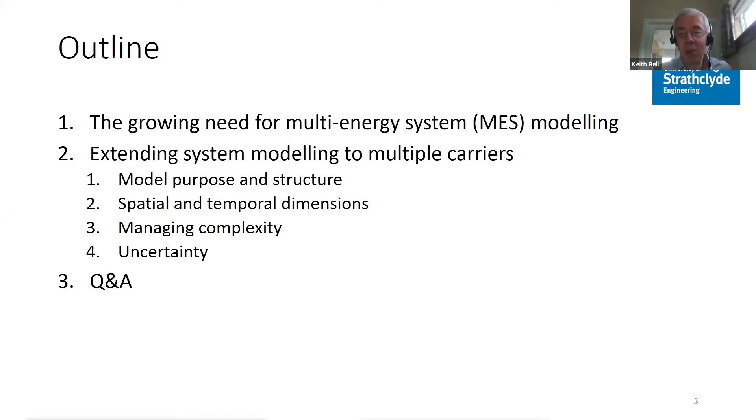For me, the main motivation for doing a lot of this is about emissions reduction. We've known about the greenhouse gas effect for 50 years, really. The evidence that points towards it has been growing. It's pretty strong, actually. Five years ago, the Conference of the Parties, the COP, met in Paris - the 21st such Conference of the Parties - and agreed a set of goals for the world in terms of limiting global temperature rise to significantly less than 2 degrees C and trying to limit it to 1.5 degrees C. So we need to take some pretty dramatic action in terms of greenhouse gas emissions to achieve that goal.

Because the impact of climate change - already we're seeing it getting pretty severe in many places - we're definitely already on that path towards 1.5 or 2 degrees C. We don't want to go any further than that. Action is needed in every sector of the economy, and that's going to have a big impact. But certain sectors are particularly hard to decarbonize - aviation, for example, shipping, certain parts of industry.

In terms of the trajectory for getting there, there are all sorts of trade-offs that need to be decided. Which things do we do first, which can come later? It's really in trying to understand all of these trade-offs that we need to do this multi-energy system modeling, and also to be sure that the resilience of an energy system - the ability to prevent, contain and recover from interruptions to supply - is not compromised by these changes to the sort of assets that we're using.

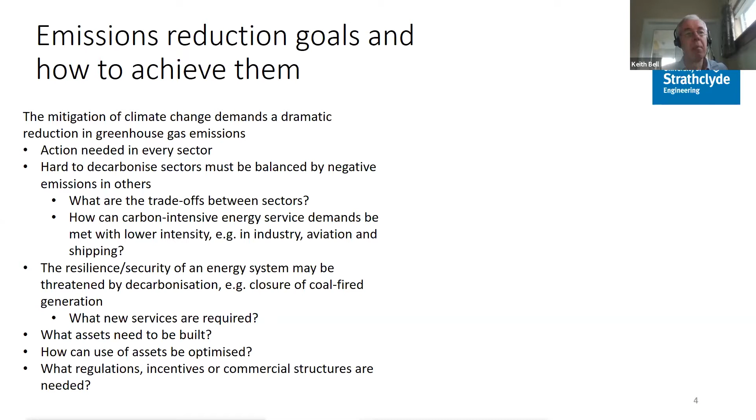That in turn raises some big questions about how are they going to be paid for? Who is actually going to invest in building and operating these assets? What kinds of regulation are going to drive it? Are there some sort of limits around their operation? What sort of incentives or commercial structures? All of these things, I think, come into the scope of multi-energy system modeling and help to show why we need it.

So you can see one for greenhouse gas reduction of 80% by 2050, but others of 85, 90, 95, and 100%. You can see some of the differences there and how it's squeezing particular sectors much harder to get the emissions further reduced.

Now, one of the things I think is maybe curious about this, it's almost a modeling artifact. This has come out from an optimization which has been set a constraint in terms of the emissions and trying to meet it at least cost, given a large set of data on the energy services to be delivered and what all the various technologies are, the relative costs and emissions.

And as it squeezes harder and gets a bigger reduction, it's actually squeezing particular sectors. So it eliminates, going from left to right, all emissions from the residential sector, but seems to leave the transport sector alone. Why should that be? Is it really so obvious that it's going to be much better to do everything in the residential sector and leave transport? Actually, I think the costs are so close together that maybe that's not the right kind of answer, especially when you look at it in light of the uncertainties about what those costs really will be.

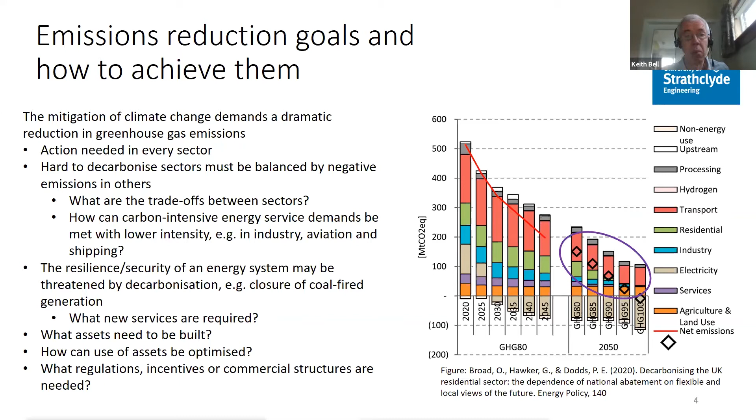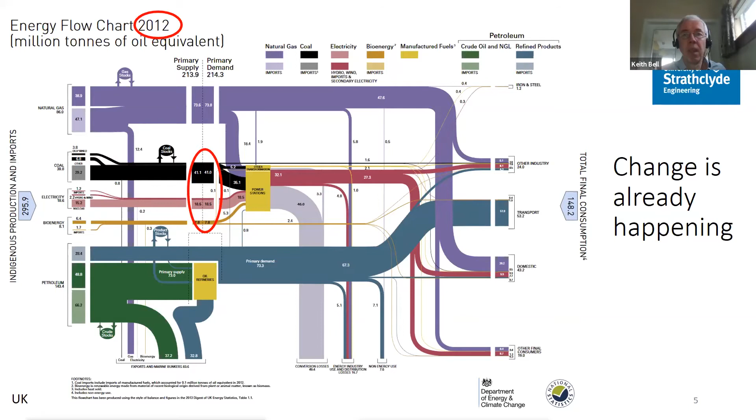Now, in terms of where electrical energy is coming from, these are the inputs and how much energy was coming from different sources in 2012. A lot of coal in that mix. If we wind the clock on to 2018, we can see that the amount of coal being used for electricity is dramatically reduced. From an emissions perspective, that's fantastic news.

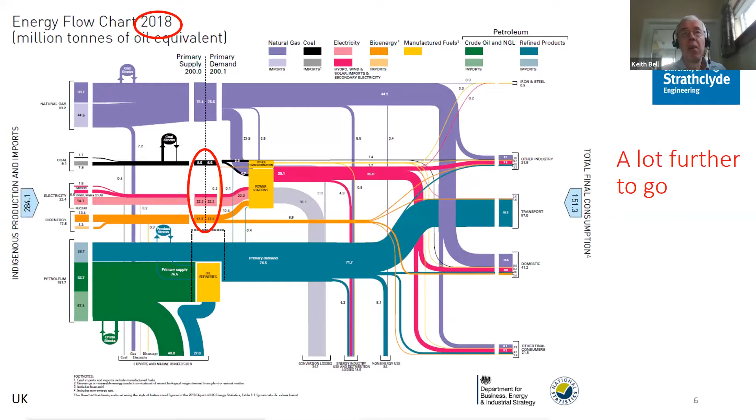However, there is a lot further to go. We still need to meet the demand for energy services, but it would help in meeting this whole challenge of reducing emissions if we can reduce the amount of energy used while still meeting the service - the service in terms of heating, cooling, mobility, lighting, and so on. So energy efficiency is a really important thing, and we still have a long way to go in terms of reducing the fossil fuel use.

So the unabated use of hydrocarbons is not something that is acceptable in 2050. There's a lot of work to be done to find out how to meet that energy service demand without unabated use of hydrocarbons. Now I say unabated, we could still be burning those hydrocarbons and trying to capture the CO2 that comes off and then store it somewhere over geological timescales. Especially in terms of meeting that service demand, I think for us in the UK and many other parts of Europe and North America, there are especially big challenges in heating and transport.

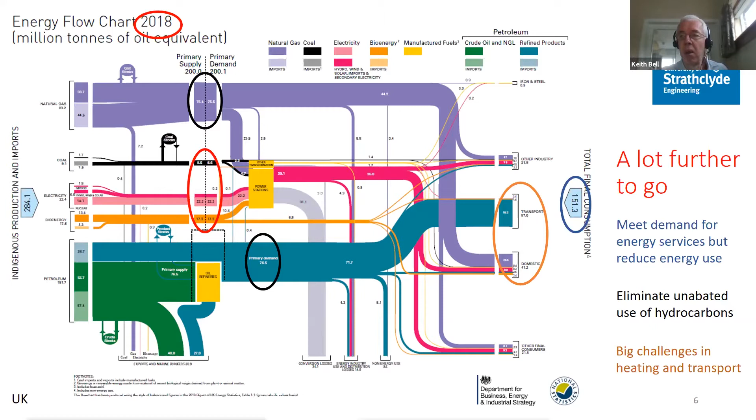We can meet demand. Now, there's some detail in there about well, what is the demand anyway? How much of it is flexible? What are the consequences of not meeting it? But I think we can understand this framing in broad terms.

Although actually, I think it goes beyond that in terms of public acceptability. There are different sorts of things that we can see already are more popular or less popular. It's not just that the total cost is minimized, it's also a question of where the cost lies, how it is spread across society, who benefits and who has to pay. Public acceptability - we see objections to the building of overhead lines, some people don't like wind turbines, other people are objecting to a nuclear power plant. But there's an impact on the wider economy in that it's not just a cost.

I think most estimates would say, yes, there is a cost. A recent study in the UK suggested that this decarbonisation by 2050 would cost between 1% and 2% of GDP.

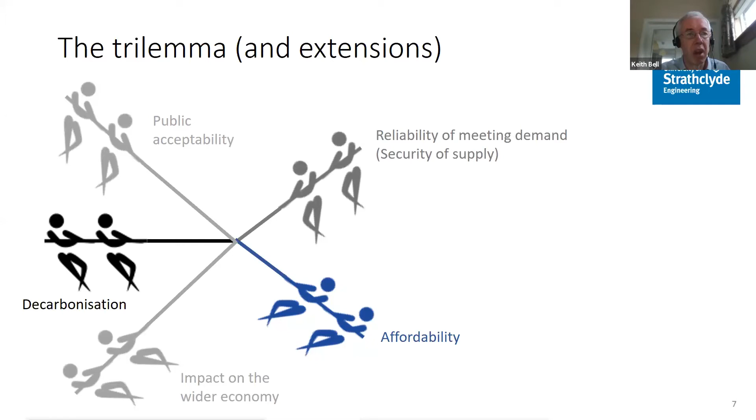This money does go somewhere. It does create jobs as well. So there is a green economy that is growing and is becoming of increasing interest. So yeah, there's a wider impact to think about.

But for us as engineers, serving the wider society, we've still got to make sure that the system will actually work, that it is stable, that it is operable, that it can be maintained, that we can meet that requirement of a reliable supply.

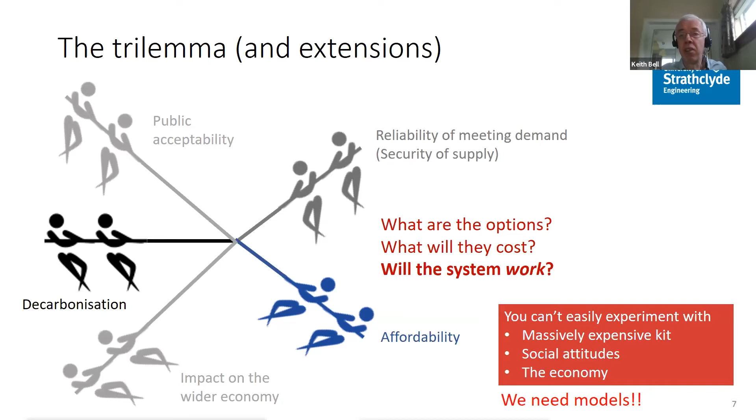Now, the trouble is, all of this involves some huge changes. The whole economy, lots of physical assets, very expensive. There's lots of things to think about in terms of public acceptance and social attitudes. We can't experiment with those things really before we commit to pretty dramatic changes. So we need models. We have to understand what the implications will be before we commit to them.

We've got to decarbonize heat and transport. What are we going to do? Are we going to electrify all of it? And what happens if we do?

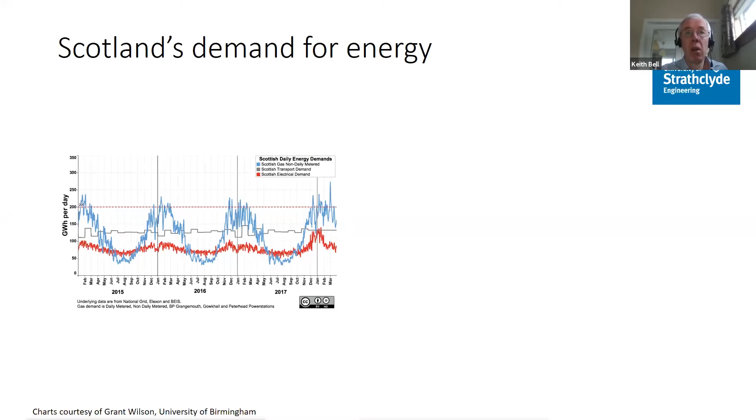So we did a bit of an experiment with a colleague at the University of Birmingham to look at, just to begin with, converting half of that gas demand to using heat pumps with a coefficient of performance of 3. Electric heat pumps are very attractive because you can get more energy out than you put in.

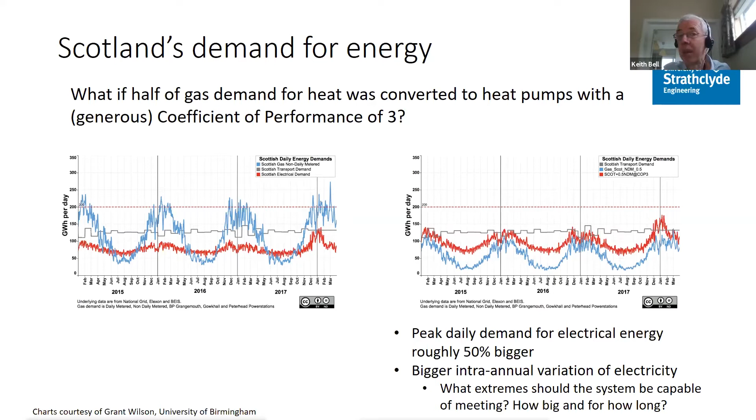And that's what we see in the electricity demand: it goes up significantly. Now that daily energy use goes up by 50%, but the hourly peak will be going up by more than that. And of course we can see a big intra-annual variation.

So how big do we need to build the electricity system? How much generation capacity, how much network capacity to meet that variability? And how much can we expect from flexibility?

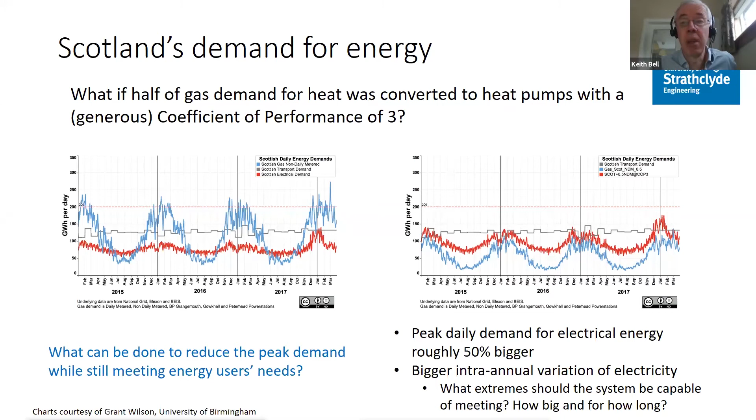Transport is another key challenge, I think. One thing that's interesting is the fact that cars, certainly in the UK, and I expect it's quite similar in other places, maybe not quite the same numbers, spend a lot of their time parked, not actually moving. So 3/4 of the time parked at home, other time at work or in public places, leaving sort of 4.3% actually on the road.

So if we're talking about electric vehicles and how they might be charged, they could be plugged in for a lot of the time. How much energy are they going to need to replenish what's been used in driving? Well, okay, just to get a first handle on this, we could look at the average mileage - how much energy would that use?

So in theory, there's a lot of potential for flexibility if these vehicles are plugged in. But of course, there's also a big spread in how much energy you need to put into the battery in order to replenish it, and then, of course, in the charging power as well.

Okay, now that's just heating and electric vehicle charging. What if we put the 2 together?

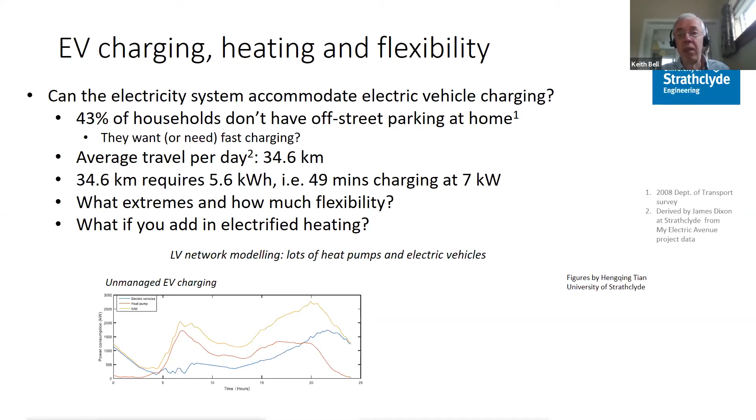But if we look at an electric heat pump demand, that's the red line. And then this blue line, it's a sort of dumb charging, just assuming how many people are arriving home in the evening and just plugging in straight away to charge their vehicles immediately. You can see there is that evening peak, which adds up to an evening peak that we see ordinarily in the UK anyway, but it just makes it significantly bigger.

With smart charging, we can try to spread that out a bit, leaving some of that EV charging to later through the night so that the peak demand is not exceeded. But we still have that peak now being determined by the heat demand. So that becomes the kind of critical factor.

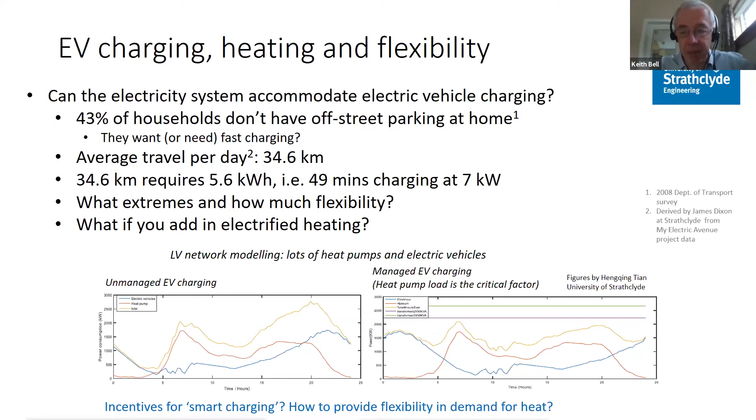Is it very easy to move that around? How much diversity can we expect? Well, one thing is that typically everyone experiences the same weather at the same time. So, okay, we can imagine incentives for smart charging, but how do we provide flexibility in demand for heat? This is the kind of thing now that we're trying to explore using this multi-energy system modelling.

One of the things that can give us flexibility is hybrid technology. So some kind of heating plant that has the choice between electricity or gas. Or alternatively, it might be burning gas and produce an output that is heat or electricity, feeding electricity back into the system to help meet the local demand.

If you've got, for example, a distribution network constraint that you have to operate within, then the question is one of optimal operation. Knowing what the time series of demand will be for heat, for electricity, knowing what all the different demands on a particular bit of the network are doing, how can we operate this particular asset?

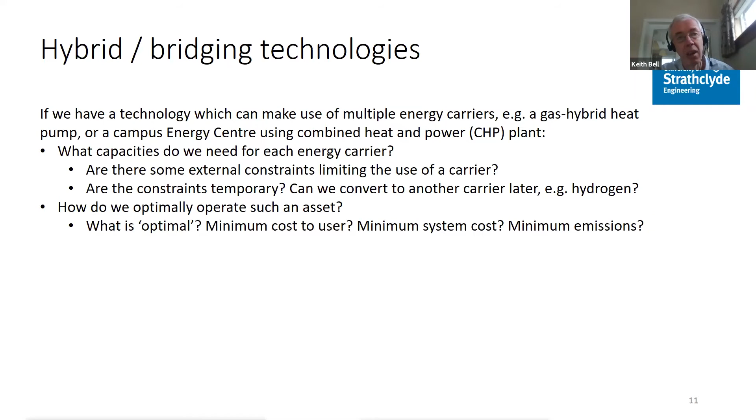But the downside of that is there are extra capital assets to be installed because you're going to have a gas boiler as well as an air source heat pump. And that's as an alternative to spending money on upgrading the electricity network. So what is the right option?

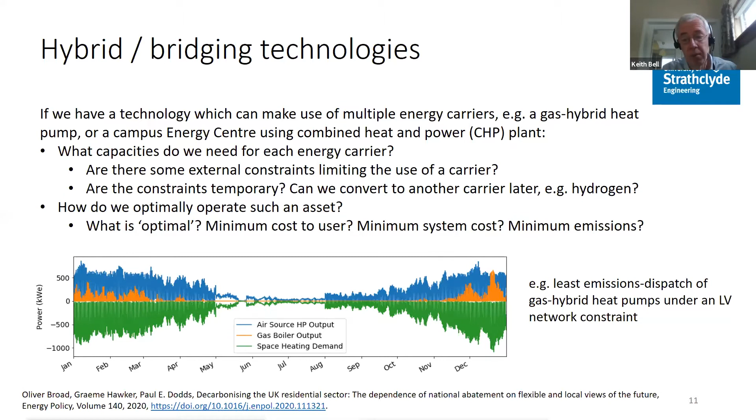One of the things that people have talked about a lot, and it comes and goes as a topic, but I think it's on a bit of an upswell at the moment, is hydrogen as an energy vector, particularly to do with the flexibility that it gives you. Thinking back to that time series of heat demand and how much bigger it is, of course, in the winter if you're in one of the colder areas.

We've got the possibility of making hydrogen all year round, storing it, and then using it either for transport or for heating only when it's needed. Now, for transport, it seems attractive for heavier kinds of vehicles, so lorries, maybe for trains on sections of track that don't have overhead lines.

Still the jury's out a little bit on whether it's useful for smaller vehicles as an alternative to batteries. But we can see it there as a use in buildings and in heavy industry, which need very high grade, high temperature heat, intensive heat. Again, it looks like an attractive option.

We've got two ways of making it. We can have steam methane reformation or autothermal reformation, the latter being a slightly more advanced process, but by which you can capture more of the CO2. This is absolutely essential if we're still going to meet these emission reduction targets, or via electrolysis. Now, the analysis at the moment suggests that reformation is cheaper, but we'll see how that market for electrolysis goes as it grows and manufacturers get better at what they're doing.

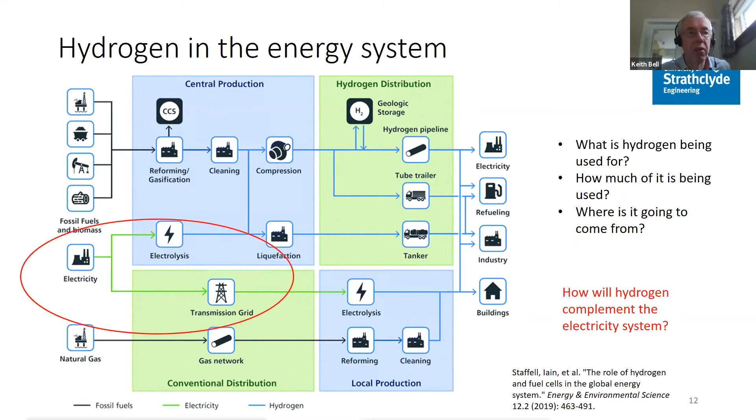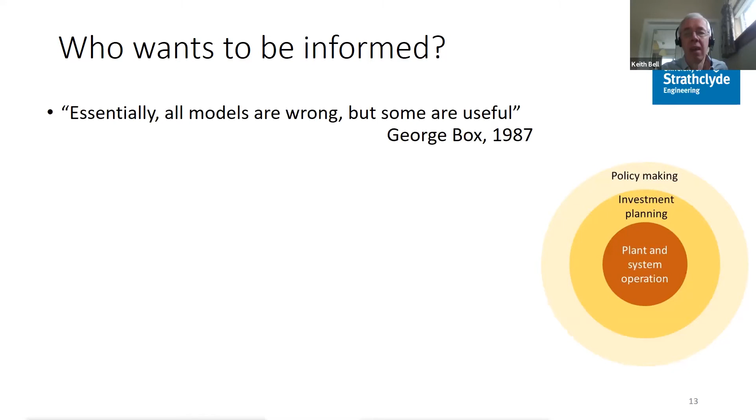So already I've touched on a number of different parties that might want to be informed by this kind of multi-energy system modelling. There are questions about how you operate plant, and questions about investment planning and then policy making. So you've probably heard this quote before from George Box a few years ago now: all models are wrong, but some are useful. So we're going to be honest about how accurate we can be, and Graeme will talk about that in a bit more detail. Then we'll get other details more so later on in the tutorial.

So yeah, plant operators want to know how to optimize the design and then the operation of these different systems when they're working together.

What are they going to build? They're not just investors in individual buildings and individual heat supplies, down from domestic consumers up to suppliers of energy for a campus or a commercial premises, shopping centre, whatever.

But also big assets such as carbon capture plant, the electricity network, the gas network. What is the future of a natural gas network if we're going to use electricity much more so, or hydrogen?

But there's also goals for policymakers. Governments have signed up to the Paris goals. We are hoping that when COP26, the 26th Conference of the Parties, comes to Glasgow, to where I live, in November next year, that they are going to agree some proper, serious, nationally determined contributions to meeting this global challenge.

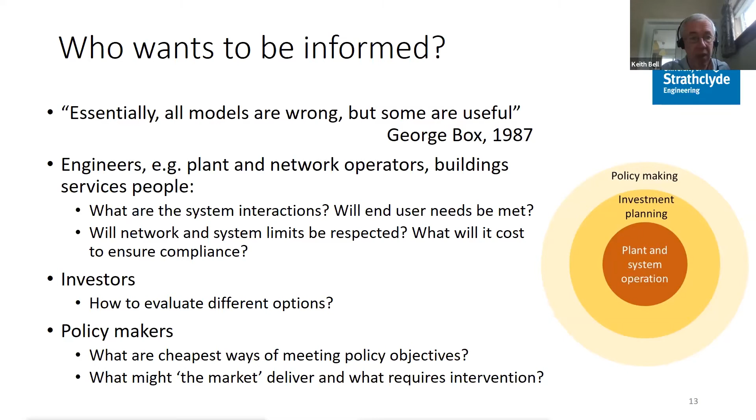They're going to have to decide what is the right way of doing it. How can they, as policymakers, drive investors to building the right assets and operating them in the right way? So quantitative evidence to inform policy and give politicians the confidence to sign up, knowing that it can be done, knowing that the costs can be shared in a reasonable way, is something that modelling is really important for.

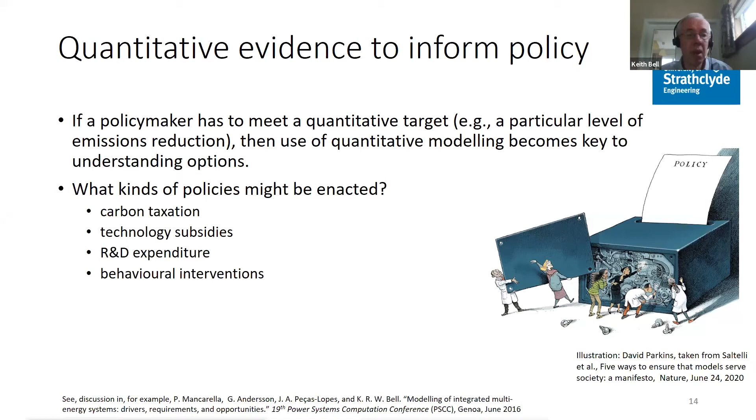I think it's motivated largely by the coronavirus crisis and the various epidemiological models that have been used there. But the kind of policies might be putting a tax on carbon, subsidies to different technologies, investment in R&D, kind of influencing people's behaviours and choices is a much harder thing.

So what is a model for? Well, it's to build up the evidence base to give confidence to policymakers. But then what is a model anyway? Now, something I think we're accustomed to in power system analysis for years and years is the fact that we can develop a methodology, determine a set of equations to represent some phenomena.

Yeah, we'll leave some out depending on what we're looking at. We can have a reasonable approximation. We develop the methodology, the solution algorithm. We debate it at this conference at PSCC.

We can then turn it into some software. We can maintain it properly. And then this method can be reused to model different systems in different contexts. So the context is determined by the set of parameters and then the inputs that we give. This is not yet established, this kind of way of doing things of here's a methodology and then we can reuse it for different situations in this multi-energy system space.

These models tend to be still quite bespoke actually. And so a lot of people working in this area think about a model as a particular combination of data and methods. And if it is quite bespoke, I think it raises some challenges that maybe we'll come back to, to do with maintenance.

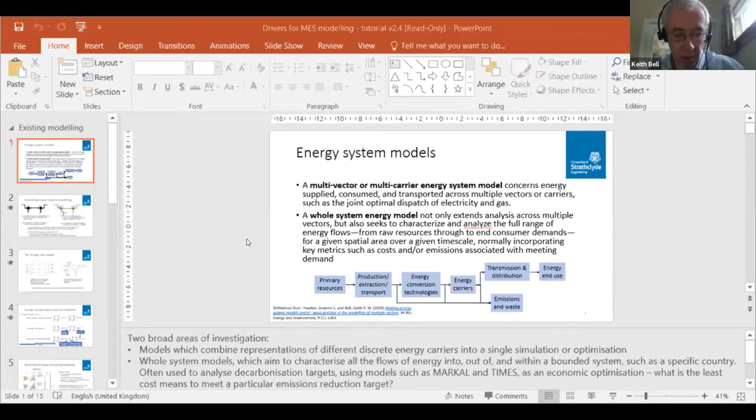Right, so can we all see that? So we can see energy system model is a big thing. Is that okay, Graeme? Yeah, that's good. So thanks, Keith.

As Keith said, I'm a researcher at Strathclyde who has spent the past several years trying to do some of this multi-system modelling. I'm going to talk in a bit more detail about some of the challenges and difficulties of actually doing this modelling in practice. I've also had the fun of trying to inform policymakers with outputs of models. I've done some work for the Scottish Government in recent history, which has given me insight into how you need to consider the design of the model when thinking about how people might use the outputs you're producing.

As Keith mentioned, there are essentially two main areas of investigation within scope. We have multi-vector, multi-carrier models that combine representations of different discrete energy carriers into one single simulation or optimization. You might hear multi-vector, multi-carrier, multi-energy — these are all basically different terms for the same thing. Multi-vector historically is the most popular term, but multi-carrier has become more common to avoid reuse of a mathematical term. But they mean fundamentally the same thing.

But there's also an older field of investigation — whole system energy models — where you're trying to characterize all the flows of energy into and out of a specific bounded system, often a specific country. These kinds of models are often used to analyze decarbonization targets, like he showed at the beginning of his presentation. If you've heard of models such as MARKAL or TIMES, these are economic optimization models that try to do the entire system from primary resources through to end energy use. The focus of this talk and tutorial will mainly be around the former, but it's worth being aware of that secondary investigation, because under the scope of decarbonization there's more and more convergence of these two areas of inquiry as we look at how multi-carrier, multi-vector systems can help meet a national decarbonization strategy.

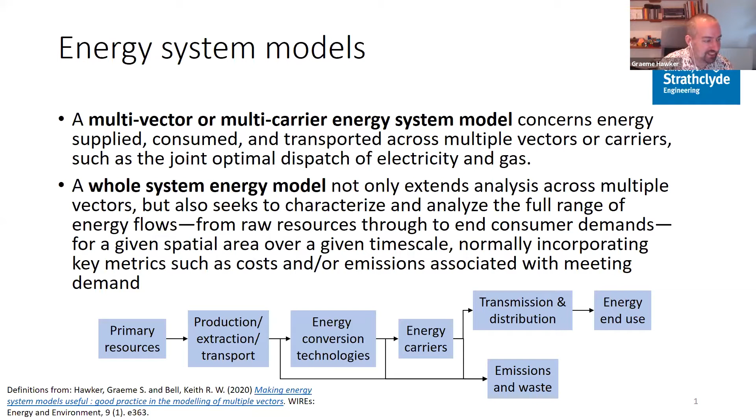So if we go on to the next slide. There are a few animations here, but we can probably push forward through them as you understand them.

If we're familiar, as we should all be, with power system analysis, for a simple power system with electrical power flow, we're probably going to apply some kind of physical representation, something like Kirchhoff's laws, to represent electrical losses, among many other things. And if we're doing an optimization in that system, we might apply constraints around generator dispatch to try and achieve an economically optimal dispatch for that system.

We can do the same thing for other vectors. If we instead model a gas network rather than an electrical network, we can do equivalent constraints and set parameters. Instead of Kirchhoff's laws, we might use mass flow laws for those gases. We might look at leakage and thermodynamic losses in those pipes. And for an optimization, we might look at constraints around the inflows of gas into that system and line pack — the pressure we have to maintain in the lines to keep the system operable.

If we model these separately, then they're essentially two separate models acting independently. The interesting aspect is when we combine these two discrete carriers into one single coupled simulation optimization. This can come from two main areas. Perhaps we have a particular location where we can convert from one carrier to the other — an electrolyzer, for example, which can convert electricity into hydrogen and inject it into the gas network. Or secondarily, we can have demands which can be met by more than one carrier — instead of saying a demand must be met explicitly by electricity or gas, we can look at how multiple carriers might be able to meet a single demand.

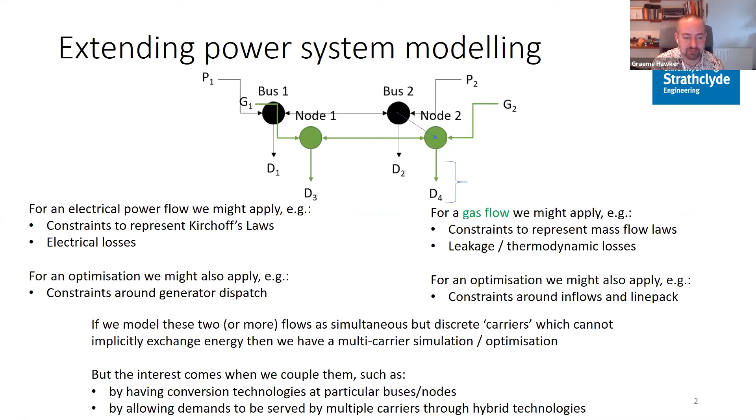If we go on to the next slide — as Keith said, there isn't really a standardized practice for analyzing multi-energy systems in the same way we've established common practices in power system analysis. But probably the closest thing we have to that right now is what's known as the energy hub model. This is a common framework within which multi-energy models are constructed. It's been around for about 15 years, where instead of looking at single-carrier electrical buses, we might represent an energy system as one or more nodes, which has a set of carrier-specific inputs and outputs. That node can have production, consumption, storage, and also technologies which convert between each of those carriers in some manner — again, for example, like an electrolyzer, which can convert electricity into gas.

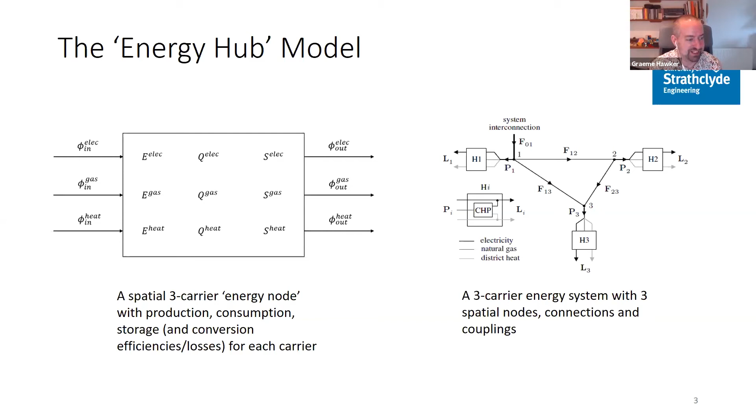You can build up a series of coupled equations which represent both the carrier-specific equalities and inequalities, but also the conversions and interconnections between them. An example is shown here for a 3-node system with 3 CHP plants, combined heat and power plants, that convert gas into power and heat output, connected to an external power network supplying 3 electrical and heat loads. You can see how that builds into a coupled system that you can simulate or try to optimize.

You can do this either as a physical formulation, where you're looking explicitly at the physics of each system and trying to model as accurately as possible exactly how gas, electricity, and heat would flow, or you can do it more simply as a commodity flow, treating all energy as identical irrespective of which carrier it is.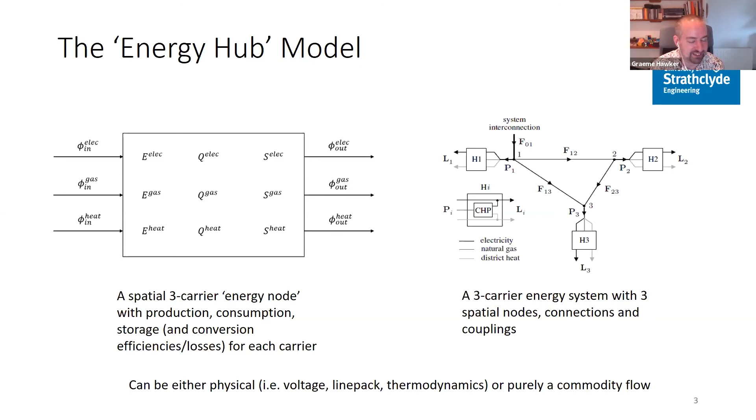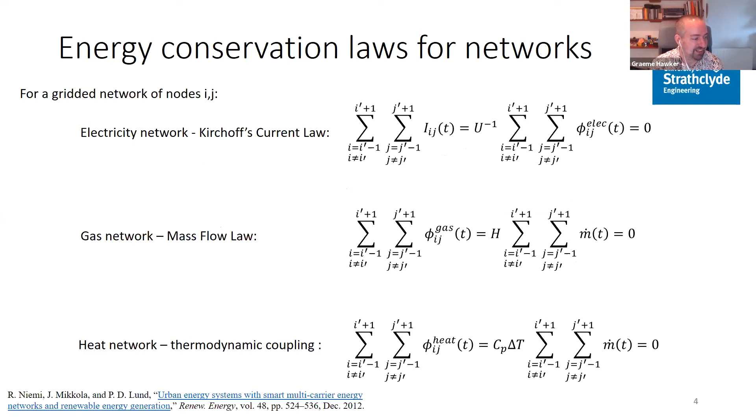It's just a commodity to be moved in bulk from generation to consumption, which simplifies things. As an example, if we had a gridded system of nodes for an urban energy system analysis, you would perhaps apply Kirchhoff's current law to the electricity network, but we have similar equations we can apply. For the gas network we might look at the mass flow law, and for a heat network we might look at the thermodynamic coupling. We have basically equivalent forms for each of these.

For the gas network we're looking at the specific enthalpy of the gas and the mass flow, and for a heat network we're looking at the heat capacity of the medium and differences in temperature. Even though the physics of each system is slightly different, we can still come up with systems of equations that couple those together. These are very bespoke, specific to the system you're looking at, and I won't go into more detail right now because the rest of the day will be full of examples of how to do this, but that shows how we build up these coupled systems of equations.

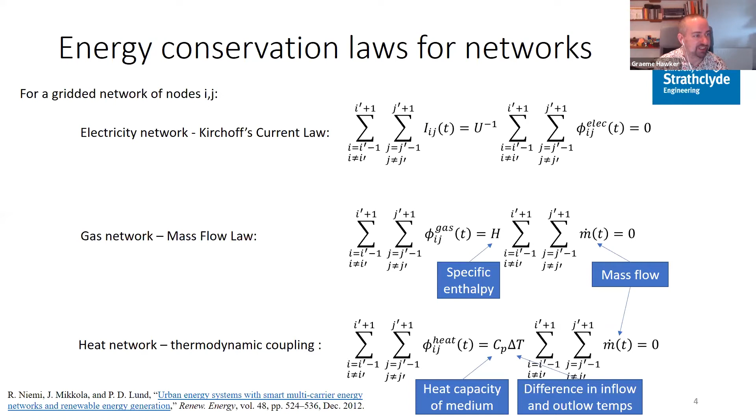However, doing so, we're quickly going to get very complex models, potentially with very high dimensionality, and we need to balance this with the other demands of our model. If we have a system with high temporal complexity, and also high spatial complexity, and we're also wanting big techno-economic detail, perhaps including integer variables rather than just a straightforward linear optimization, and we're also trying to do multiple sectors at once, we end up with extremely complex models that can be very hard or almost impossible to actually solve in any tractable manner.

So one of the challenges in multi-energy modeling is understanding this challenge of breadth and depth. How accurately do we want to represent each sector? How broad should the modeling scope be? And where do we set initial and boundary conditions for our model? Especially if you're trying to represent all the physics of the different sectors, it can be very hard to include that, and any non-linearities in the system make things even more computationally complex. So if we have to make compromises in a multi-energy model, we should bear those in mind when we come to interpret the results.

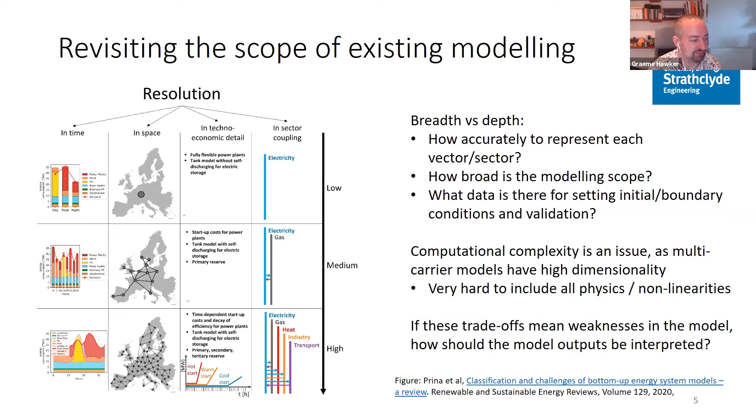If we look at these issues of complexity, there are various options available to reduce this. These will be familiar to people doing power system analysis alone, but become more relevant as we deal with higher dimension models. We can parallelize the problem, try to decompose it into sub-problems that can be solved separately and simultaneously. If we have high resolution in the temporal domain, which is very common for these models, we might seek to reduce that in some manner.

This graph shows an output from an interesting paper which looks at reanalyzing the same system with multiple different time resolutions. You can see that as temporal resolution is reduced, you greatly reduce the computation time required to solve the model, but it doesn't have much influence on the actual output until you get to very low resolutions. So a solution can be to take a subset of your model and check if you adversely impact the output just based on the resolution you're using.

And there are other methods as well, so you can use heuristics, looking at minimum maximum periods, mask periods that you're not interested in at lower resolutions, use clustering techniques, that kind of thing.

We also need to deal with spatial complexity, and again that's a balance between the other dimensions that you have. So these big whole system models that we're talking about are often single node models - they don't have any spatial element whatsoever. We can look at reduced selections of technology, and again we can reduce our model down to commodity flows of energy rather than physical flows to reduce that complexity further.

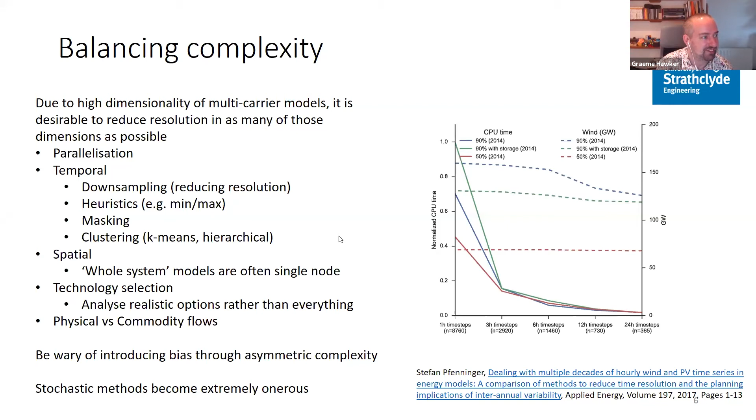One further thing to bear in mind is that, as Keith mentioned before, there is a difference between carrier demands for energy and actual energy service demands. So in single carrier models, traditional power system models, we would just define a demand for electricity, for example, and have a time series of demand that has to be met. But in a multi-carrier model, we may instead be interested in exploring how that demand can be met from a variety of resources. So if we define demand specifically as one carrier, then we might be artificially limiting the scope.

So we might be more interested then in energy service demands rather than the carrier specific demands. So in the case of a heat system, for example, we need to treat demand at the service level because then we can compare the different technologies. And so if we understand what the demand for space heating, demand for hot water is, we can look at how those might be supplied differently through different carriers.

But if we're looking at perhaps demand side response in our models, then we need to go a level further than that. We need to understand what actually creates those demands for services and what the behavioral and physical drivers for that. So for example, in the case of heat, we would need to understand the range of comfort levels of people living in buildings and how that interrelates with the building thermal envelope.

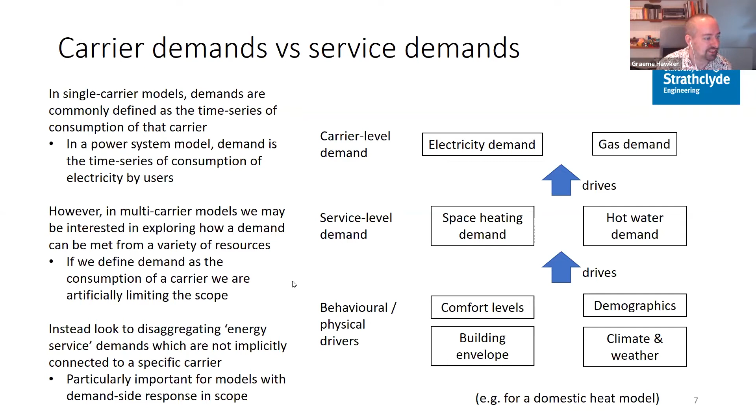So this means that the multi-energy models that we're looking at may have fairly significant scope. They might go quite far outside what we would normally treat as an energy analysis. And this means, as I said, we have on the right things like energy service demands rather than carrier demands, but we're also getting into spaces such as interactions with the environment.

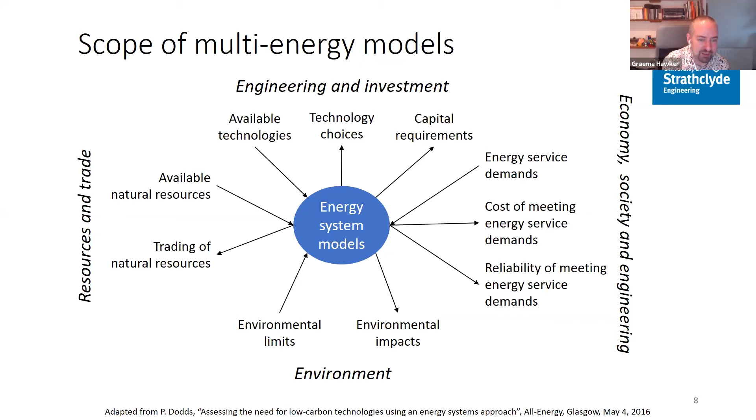And this is an increasingly significant area of interest in up-to-date research. So there are more and more models these days on how energy interacts with, for example, the water system, as different forms of energy production resources use different volumes of water, but also into how we interact between different countries in requiring different resources - so trading and availability of natural resources that are at the top end upstream part of the system. Next slide.

So one other way to deal with this very broad potential scope is, of course, to soft link between models. So rather than trying to couple across the entire scope of analysis, we instead utilize multiple models and use outputs from one model as an input to a second model. Within the scope of power systems, this would be perhaps evaluating the outputs for economic optimization in a generation investment model, and then testing that in a power system adequacy model to make sure the system can actually operate.

But in a multi-energy space, we might instead look at using an economic model to derive those energy service demands, use multi-energy analysis to derive what the optimal supply of those services might be from different carriers, and then to analyze the carrier-specific flows, perhaps the electricity flow and the gas system flow, within vector-specific analyses that then checks that we have a fully operable system.

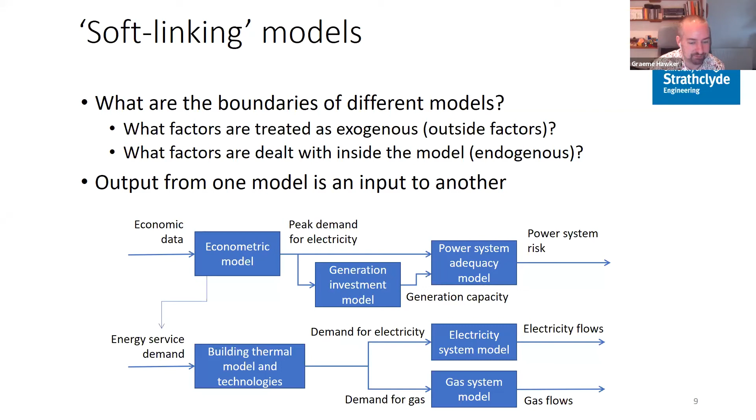So we can then ask what the contributions of a useful model might be. This comes from some of my experience trying to interact with the policy space. I think often as academics, we're principally concerned with creating new formulations that stand a good chance of being published without necessarily considering the full external value that the modeling can provide. There are certainly multiple means by which a model can provide useful evidence without necessarily having significant novelty within its own modeling framework space.

Within the potential complexity we have in multi-carrier modeling, it would seem useful to reuse existing methodologies as much as possible. So I've given a list of things that could be used that aren't just about a new framework, but also demonstrating existing technologies in new spaces, showing how different technologies or policies compare to each other, and how we contextualize and apply each of those possibilities.

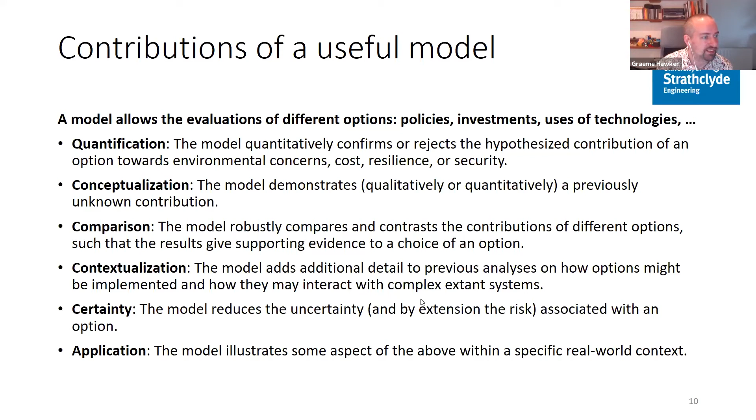Next slide. We can relate this sense of usefulness back to the scope and complexity of the modeling we're trying to conduct. There are a number of different phenomena within energy systems that we might want to evaluate, each relevant to a different time frame. We can perhaps look at multi-energy systems at lower temporal resolutions.

If we advance the slide one step, we can perhaps use that to analyze the design of a future energy system that's meeting a future decarbonisation target, then complement that analysis with carrier-specific modelling at higher and higher temporal resolutions that determines if we're resulting in a fully operable and secure system.

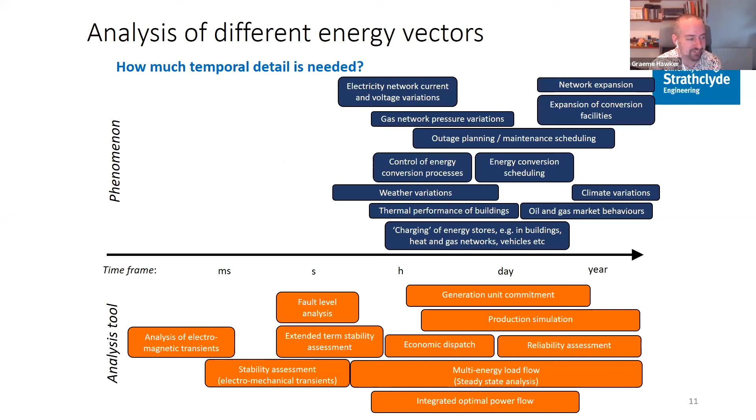For my last slide, if we're looking to conduct some useful modelling, how should we proceed? We put together this kind of idealized framework for how we think people seeking to do modelling in this space should proceed. The first step is to accurately define the problem, both in terms of the questions to be answered, but also setting the bounds and scope.

Secondly, select a modelling framework that is useful for those questions within that scope. Define how you'll capture uncertain and unknown parameters, scenarios for that model, then move on to finding data, which can itself be a significant challenge if you're trying to match up multiple vectors. Certainly availability of data in fairly new areas of investigation can be very difficult to achieve.

We would also seek to reduce the number of scenarios we have, so we get the key comparative outcomes. We reduce some of the complexity we're trying to deal with, but while making sure we get some insight into uncertainty. And lastly, present the results of that modeling within their local scope, the scope of the model, but taking into account how that interacts with the external world.

One problem we often see is that modelers in the academic space often begin with the model before deciding the problem. People in academia may come in at the design phase with a framework already in mind to use, or even have a fully parameterized model already available, and not entirely sure what it is they're going to do with it.

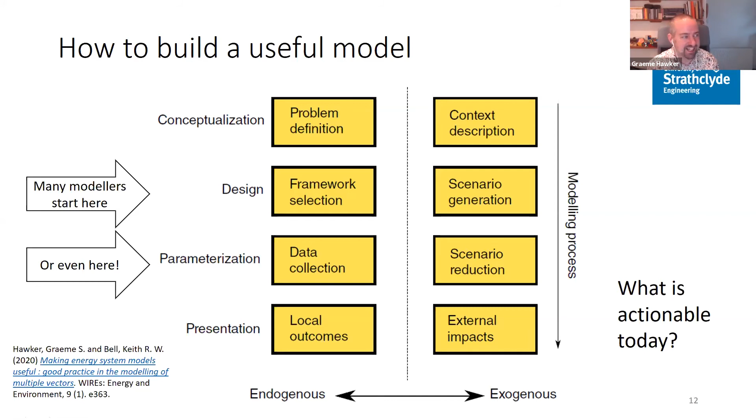I think if you advance the slide a couple of points, you'll see that highlighted. Perhaps at this point, I can bring Keith back in to look at some of these issues when we look to implement models, and their place in the world, not just within the academic environment. So if I can perhaps ask Keith who he thinks is using multi-energy models at the moment, and who should be using them.

Yeah, well, I think both you and I have interacted with policymakers. We've done some work with Scottish government, and we know some people in the UK government who are trying to use some of these multi-energy system models to look at potential pathways towards 2050 and decarbonisation. These are difficult models to use because they're very data hungry, actually. Normally the way they're formulated is quite simple, a simple kind of linear optimization with this emissions constraint.

It takes a bit of care to know how to interpret them, I think, as well as building it up. What's your experience, Graeme, since you've spent some time in the Scottish government? We're working with some people who are using TIMES models.

I think there is obviously a desire within the policymaking world that output should be as simple as possible, which is a significant challenge when, as I've highlighted, these models are by nature highly complex, and presenting uncertainty in particular can be very difficult. And you always have this issue that people home in on the sector they're particularly interested in. If they see any single weakness in the bit they're most familiar with, they interpret that as weakness across the entire scope of the model.